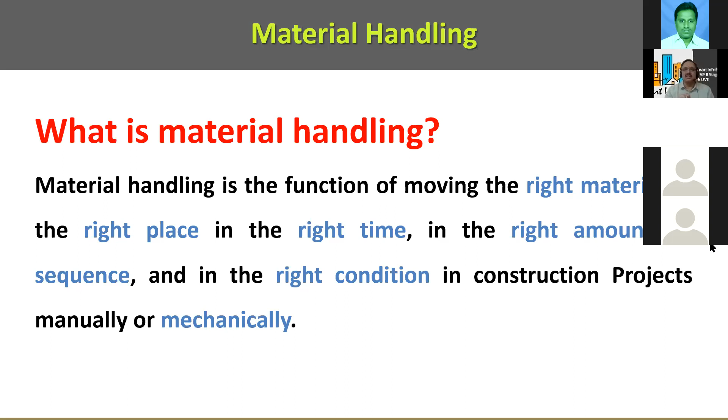This definition is also applicable to lean construction, which I'll cover again in due course. Lean construction actually means the right material to the right place at the right time - that means the shortest distance. If you track the movement of material, it should be the shortest distance. That is all about lean construction, apart from communication.

Now let us see what material handling is in projects. Any material starts from mining. Take any material - whether it is flooring, masonry, concrete, steel, even our doors and windows nowadays, the metal doors and metal windows, UPVC - all this starts with mining.

Then we mine, load it onto a conveyor or transport it, stack it. Again, from the stacked position, you transport it, process it, pack it, load it again, transport it, unload at the site, store at the site, shift it at the site, process again, load again, transport and place. See how many transports are there for any material.

Let's take the example of cement. Cement starts with the mining of lime deposits. So we mine the lime, take it to the cement plant, stack it, then transport it, process that lime in the crusher and all that.

Finally, process it, pack it into bags, load it again onto the truck, transport it to the site, unload at the site, store at the site, and again shift the cement for the mixing process - concrete or mortar - then load it, transport it, and place it at the right place.

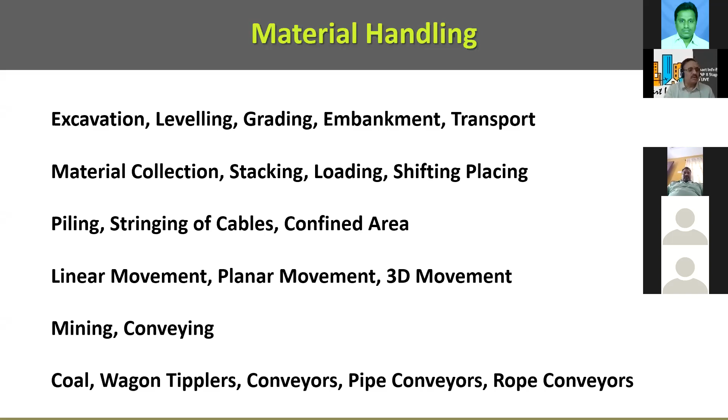Mining also uses bulk material handling systems, and conveying - after mining you have to convey the material and stack it somewhere. Coal, wagon tipplers, conveyors, pipe conveyors, rope conveyors are all various material handling systems that we come across as civil engineers. So we should all be aware of these systems.

Crushers means we use crushers for aggregates, coarse aggregate or fine aggregate. These are also very important, where there is a lot of material handling. You get the boulders, mine the boulder, crush them, move it, sieve it, and finally load it into the truck to get it to the site or batching plant. So crushers, silos for storage of material - a silo also in a way handles the material, so it comes under material handling.

Batching plants - we use all these silos and conveyors, and we have hot mix plants for highway projects where also we use a lot of material handling.

Tippers also we use for transportation of the material. So these are all the various material handling systems. You can see, starting from handling the drums, we use the forklifts for shifting of the material, and how we move the drums to the silos in the batching plant, how we load the material into the silo, and from the silo how we take it to the process, and even all this type of material handling system. We should all be aware of all these material handling systems.

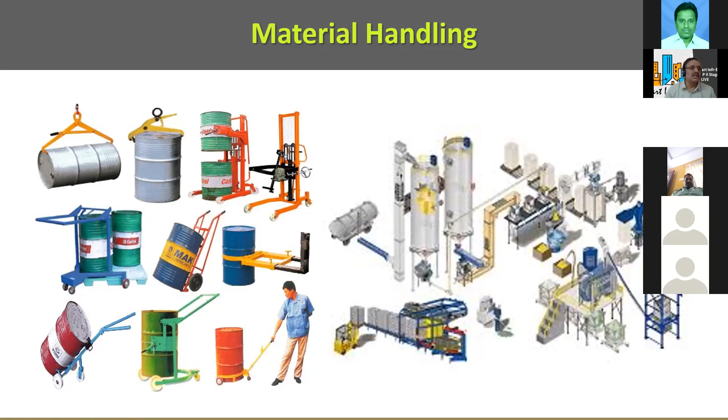This is lifting. We have these collapsible stools, and we have the forklifts and trolleys for moving the material. So these are all semi-manual movement of materials we use in construction sites, or industrial sites, or workshops, whatever we use in workshops.

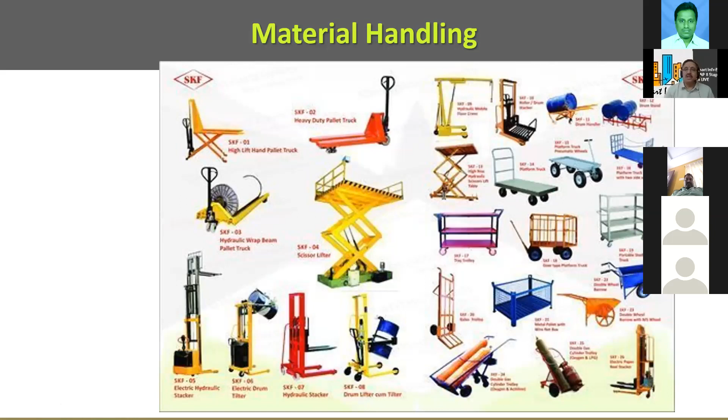And we use the cranes in the construction site. So we should be aware of categories of cranes. We have jib cranes, we have bridge cranes, we have gantry cranes, we have stacker cranes. So these are all the types of cranes we use in construction sites.

Mostly you see this kind of gantry crane nowadays in what you call precast yards. Whether it is bridge precasting or building precasting, you need to move the material, stack the precast elements and all. So we use gantry cranes which can move, and the spans can be as large as 20 meters, 30 meters for these gantries.

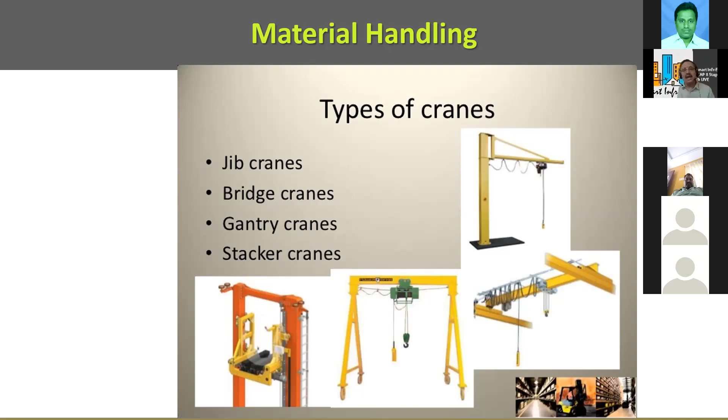So normally, material handling manually used to be done in almost all the projects in olden days. Of course, even 100 years back there were cranes, but limited use. In very large projects, they used to use them; otherwise, most of the projects had manual material handling.

For small size construction projects nowadays, people are still using manual material handling. We see in small sites even in cities, like 500 square yards, 1,000 square yards kind of sites, people are still using on-site mixing of concrete. They are not using ready-mix concrete, though it is available. So there you will have a lot of manual material handling.

It is limited to weight of material, because with manual handling you can at the most lift and shift about 20 kgs of material. Imagine how many people are required to shift 1 ton of material at a time. So it is a huge manual labor required.

And for short distances also, people use this manual labor. And where transport facilities are not available also, people use it. But I have used mechanization even in the remotest projects in the border of our India. So it is possible to use mechanization nowadays in any site.

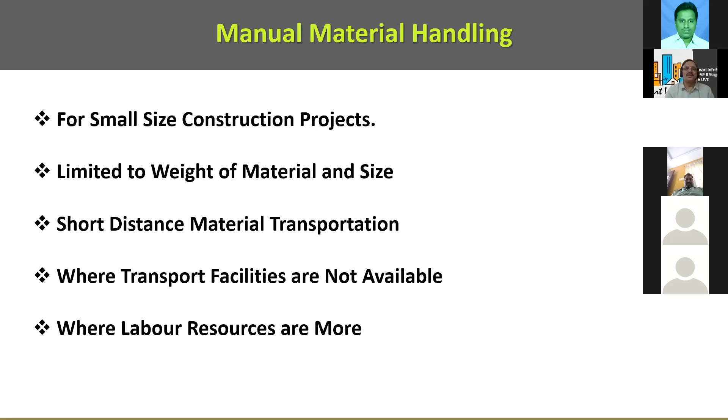So manual shifting, manual lifting is something we should avoid. As engineers, we should always encourage mechanization over manpower. People talk about manpower to be utilized. Even if you mechanize, there will be the same manpower required, but in different ways. So we should convert this kind of labor into more dignified labor, machine operators, and engineering kind of roles.

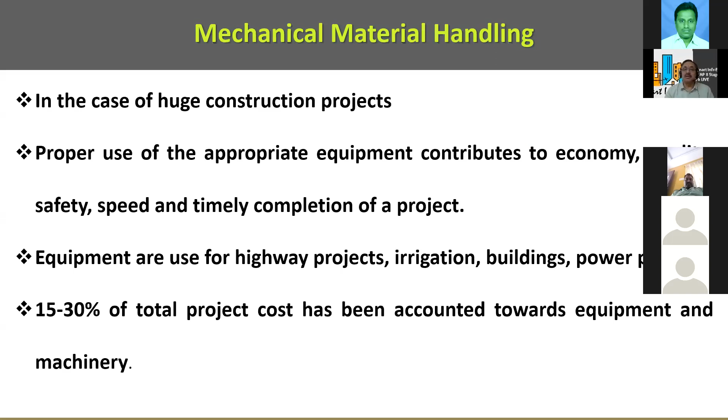So mechanical material handling is done in most of the huge construction projects. Proper use of appropriate equipment contributes to economy, quality, safety, speed, and timely completion of the project. Equipment is used for highway projects, irrigation, buildings, and power projects also. And 15 to 30% of total project cost has been accounted towards equipment and machinery. So this is a very important point.

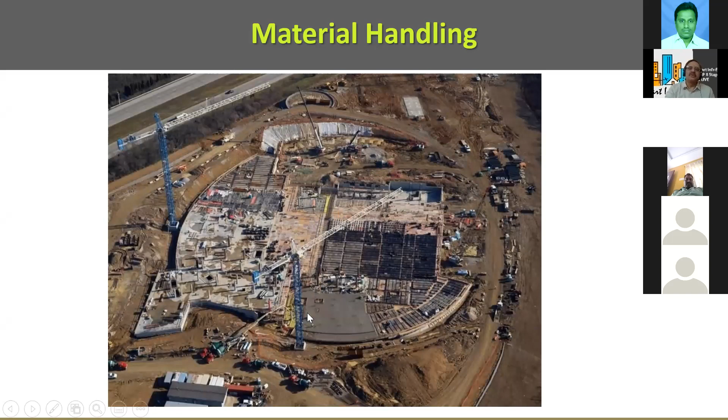So this is a typical picture of a site nowadays. You can see all the machines, all the transport vehicles, and all the cranes. So we should plan the construction site such that we cover the entire site by the movement of these jibs in the cranes, and at any height. So we have different types of cranes which we'll be covering today. This is the picture of past and present.

Even in building projects we see the same scenario. We have to mechanize 90% of the movement of materials nowadays, whether by weight or by the total handling distance. So coming to earth moving.

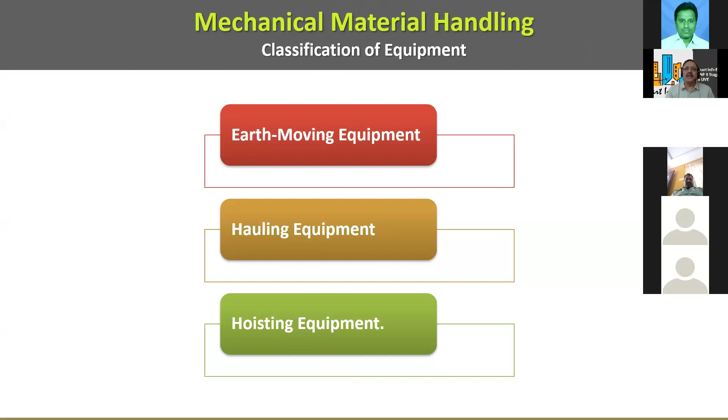In the classification of equipment, we have earth moving equipment, hauling equipment, and hoisting equipment. In earth moving, we have power shovels, backhoes, drag lines, clamshells, scrapers, and bulldozers. These are all the machines that we use.

I always say nowadays civil engineers, when planning a contract, must first decide the level of mechanization and incorporate the machinery required at the project site, even keep it in the pre-qualification. So we must all be well aware of the machinery required for each operation and their capacities, which we can get along with operation levels and costs through catalogs.

So the power shovel is used to excavate the earth and load it onto trucks, capable of excavating all types of soil. Its size varies from 0.375 cubic meters to 5 cubic meters, so a wide range is available.

Basic parts of the power shovel include the track system for movement, cabin, cables, rack, stick, boom, foot pin, saddle block, boom point, sheaves, and bucket.

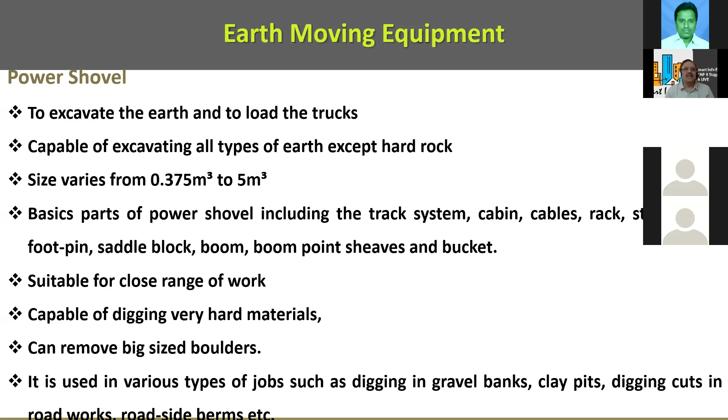The backhoe, also known as hoe, back shovel, and pull shovel, is used to excavate below the natural surface on which it rests, generally used to excavate trenches, pits, basements, and grading work which requires precise control of depth.

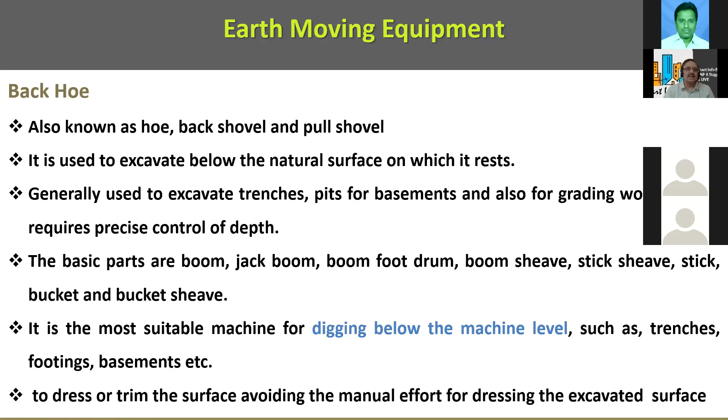We call it JCB mostly, but its technical name is backhoe.

Next is the drag line. It's so named because of its prominent operation of dragging the bucket against the material to be dug. Unlike the shovel, it has a long light crane boom, meaning it can stretch to any place, and the bucket is loosely attached to the boom through cables. Because of this construction, a drag line can dig and dump over larger distances than a shovel can do. So that is the difference.

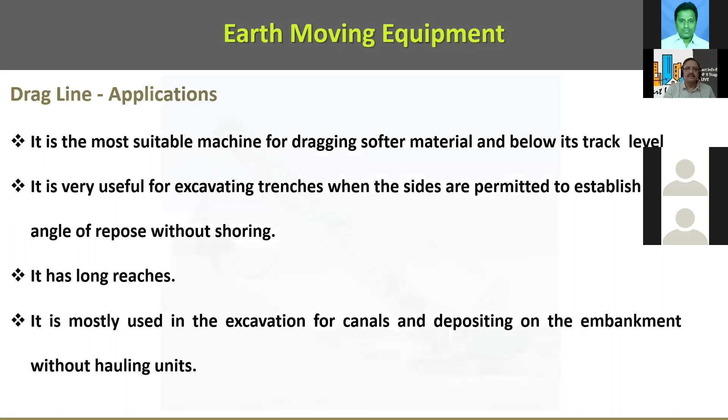Applications are: it's the most suitable machine for dragging softer material below its track level, and it's also useful for excavating trenches. It has long reaches, and is mostly used in excavation for canals, because canal width is higher, so you can form the embankment without hauling units, excavating and depositing directly. This drag line is also used in crushers.

Next is the clamshell. This is so named due to resemblance of the bucket to a clam, a shellfish with a hinged double shell. The front end is essentially a crane boom with a specially designed bucket loosely attached to it.

It can pick any stone or boulder, move it and place it. It moves like a clam, and can also be fixed with an anchor. It is used for loose materials such as crushed stone, sand, gravel, coal, etc. Its main feature is vertical lifting of material from one location to another, and you can shift it too. It's mainly used for removing material from coffer dams, sewer manholes, well foundations, etc. So you can pick it up easily.

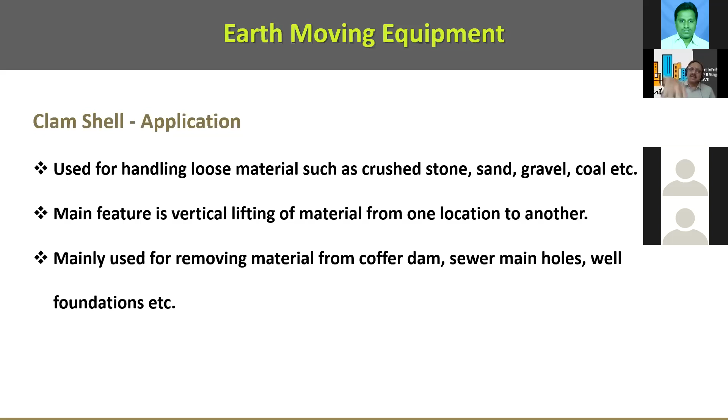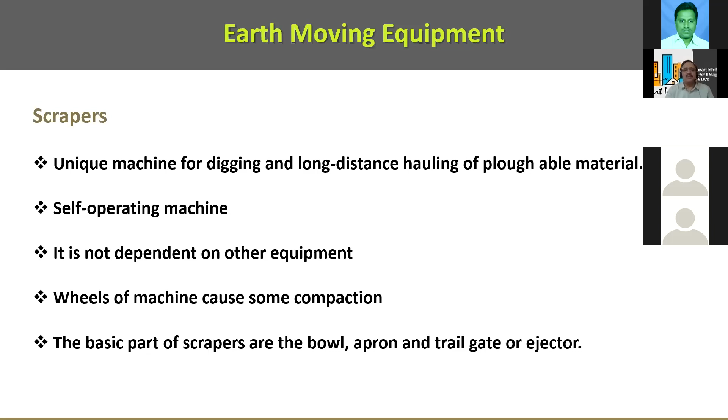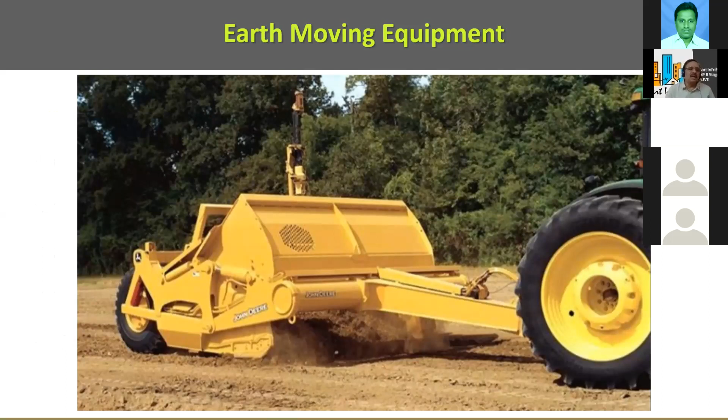Scrapers are mainly used for highways and runways where large stretches of existing surface need to be dug, and for long distance hauling of ploughable material. It is a self-operating machine, not dependent on other equipment, though the wheels of the machine cause some compaction. The basic parts of a scraper are the bowl, apron, and tailgate or ejector. This is the scraper. You can see the earth can be removed at a larger surface area, and it can be spread and leveled for formation of the subgrade in highways and runways.

Next is the bulldozer. The heavy blade attached to the tractor pushes the material from one place to the other. That's why we use 'bulldoze' in the literary sense also - it's very popular. The tractor can be of a crawler or a wheel type, and there are different types of bulldozers.

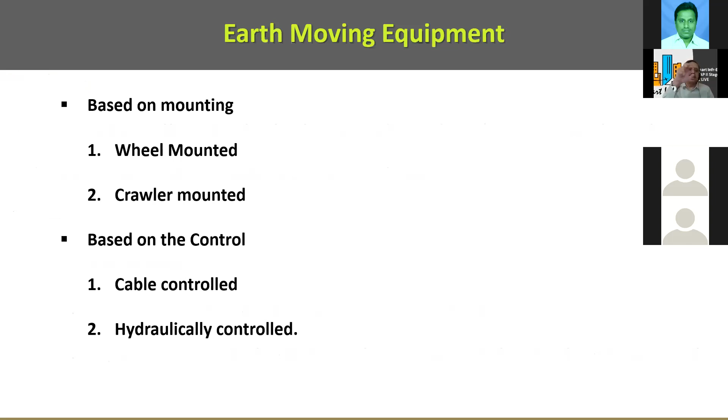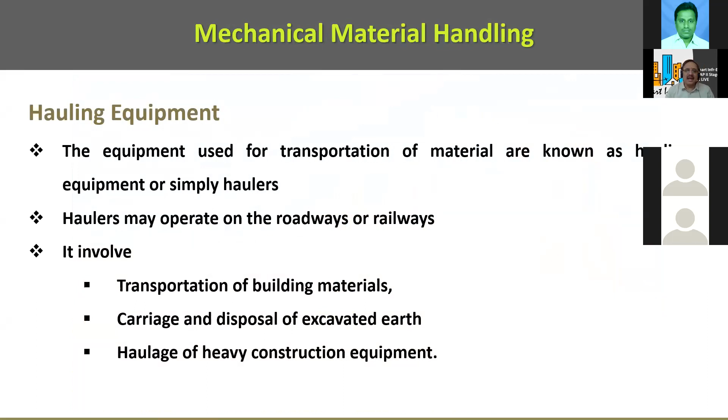Next is the hauling equipment. The equipment used for transportation of material are known as hauling equipment, or simply haulers. Haulers may operate on roadways and railways, and involve transportation of building material, carriage and disposal of earthwork, excavated earth, and haulage of heavy construction equipment.

These are classified on the basis of method of dumping the load. So we have dump trucks - side or rear dump trucks, and bottom dump trucks - and dumpers.

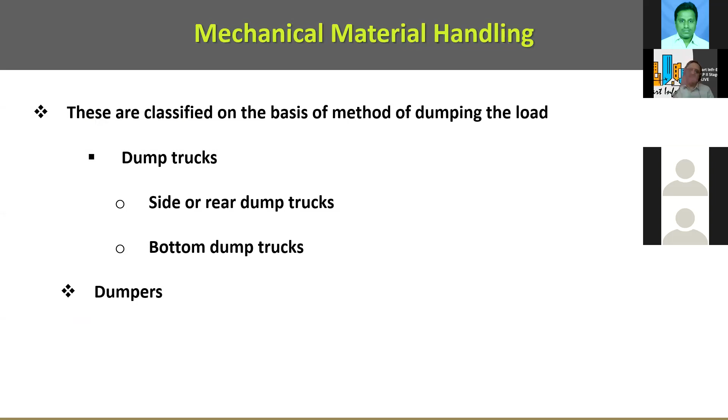Dump trucks are used for earth moving purposes. The selection of the type of dump truck is specified in many projects - what capacity is required, how many dump trucks are required, depending on the quantity to be handled. So when we schedule the project, we have to consider all these resources and specify them in our document.

Recently I went to a site where the engineer was answering, 'Sir, this is a fast track project, that is why we could not have the material readily on site, so we had to use the wrong material.' That's not an engineering answer.

Similarly, when we do a fast track project, we have to estimate the machines required, their capacity, and their productivity levels, and then plan the schedule. It's not just using Primavera or MS Project that is planning. In planning, we must visualize the whole project - what is the material movement, and how the material will be moved cost effectively, in a time bound manner, and efficiently - and then plan our schedule. The schedule should define all these machines required so it is realistic and achievable within the cost estimate, which must consider the capital cost of these machines. That is how we should decide the mobilization advance, because it costs to mobilize all this equipment to the site.

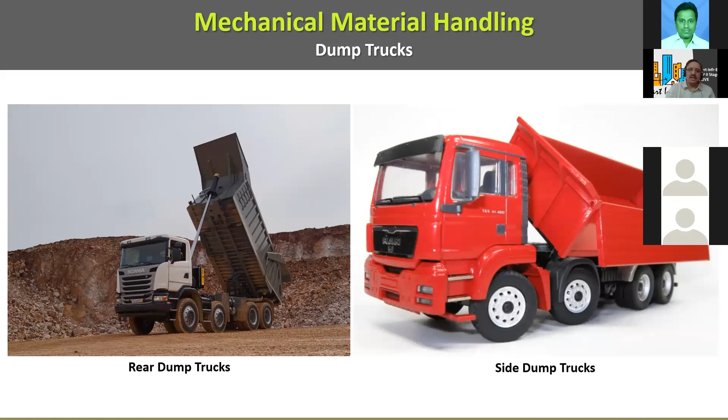The dumpers are high-speed pneumatic wheeled trucks, very important for transporting material on site. A loader will load the dumper, which will take and dump it wherever needed in the spoil tips. With a short chassis and strong body, loading, hauling and dumping is very fast compared to other equipment, suitable for short hauls on rough roads, especially where shuttle movement - pick, dump, and repeat - is required. This is a short haul dumper.

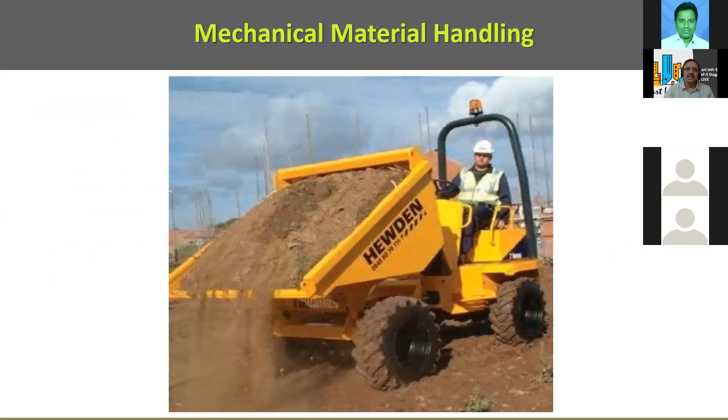Hoisting equipment. Hoisting is lifting a weight from one location and moving it to another. We have different types of hoists, including builder hoists and cranes. Big projects such as construction of dams and industrial buildings require hoisting equipment.

A crane is the only single machine which, as a single piece, is capable of providing three-dimensional movement of any weight. So these are the hoists.

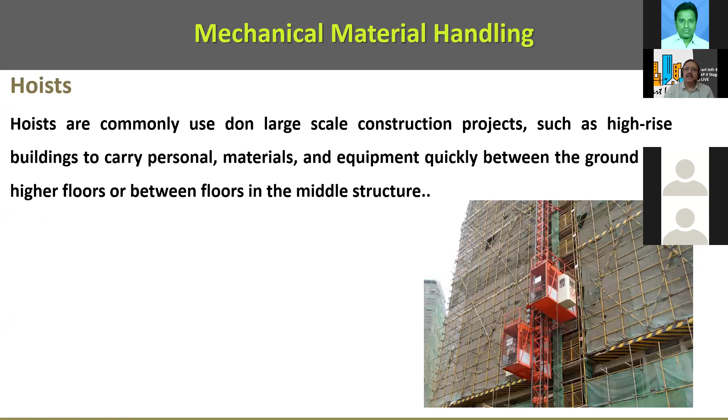You can see this is a builder hoist and a passenger hoist, and multi-purpose hoists are very common nowadays. You can shift material as well as workers. These are very important for any high-rise construction.

This is a simple builder hoist for lifting material. Even for a 5-storied construction, you can use this builder hoist for shifting material like bricks, mortar, and any other material.

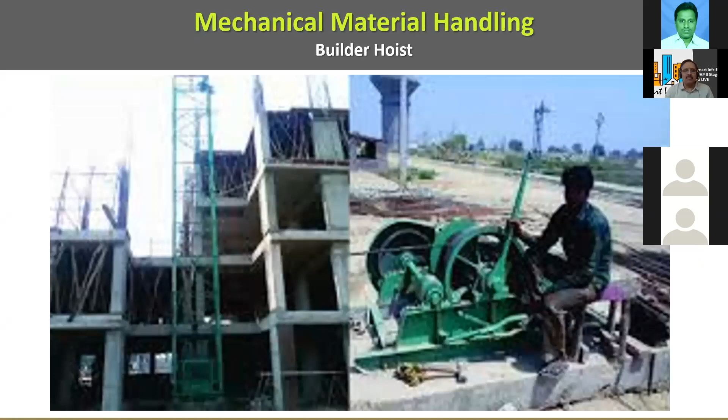This is a builder gantry hoist, which you can use even after construction for shifting material. You tilt the bucket by pulling into the building line. This is the builder gantry hoist.

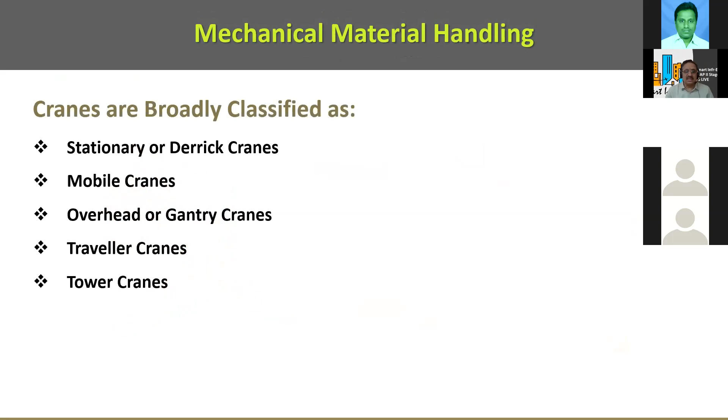Next is cranes. We classify them as stationary or derrick cranes, mobile cranes, overhead or gantry cranes, traveler cranes, and tower cranes. These are all the types of cranes we adopt in construction sites.

Derrick cranes consist of a mast, a boom, and a bull wheel on which the boom rotates about a vertical axis, with supporting members. They can be electrically operated, diesel operated, or diesel-electrically operated. The boom can revolve through 360 degrees. This crane is used for heavy loads up to 200 tons, even up to 300 tons.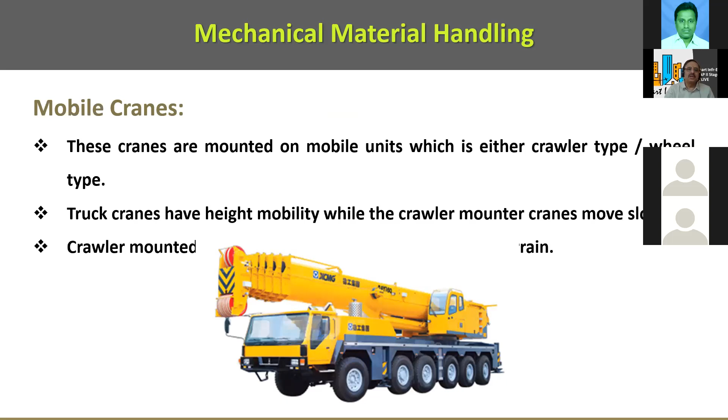So this is a crane which can rotate, and these are jib cranes. This is a telescopic crane also, which is wheel mounted, and similarly we can have crawler mounted cranes.

Gantry cranes serve large areas, particularly in casting yards. In construction sites we require this kind of gantry crane, with freedom from floor obstructions, moving overhead with three-way mobility - horizontal, longitudinal, and vertical movement. They are widely used in erection, foundry, steel plants, storage yards, and various industrial works.

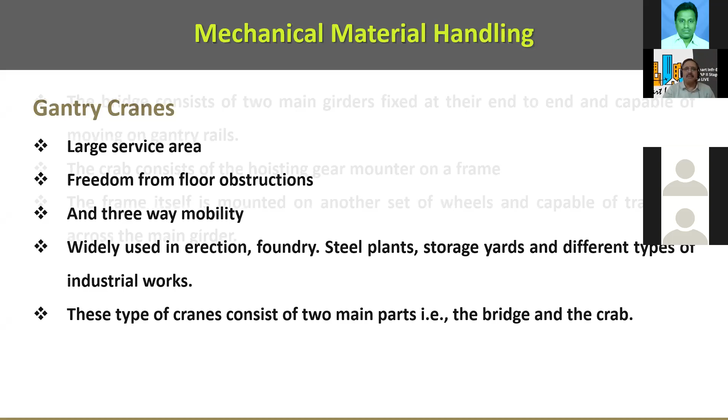A gantry crane consists of two main parts: the bridge and the crab. The crab is for moving, and the bridge is for shifting the crab. The bridge consists of two main girders fixed at their ends, and the crab consists of hoisting gear mounted on a frame, which itself is mounted on another set of wheels. This is the gantry crane, seen in yards and casting yards.

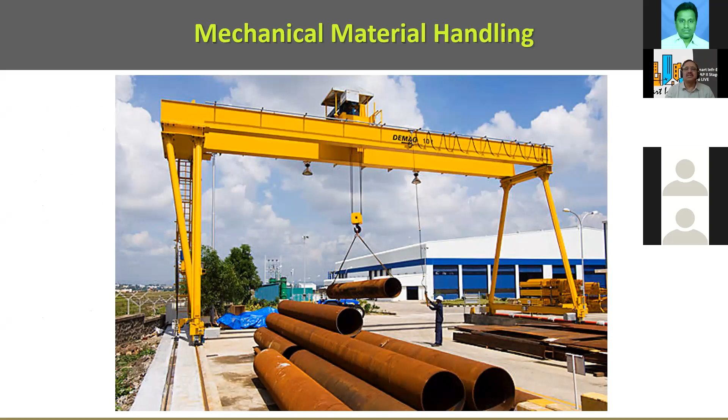We also see these overhead cranes in workshops or factories that we design. Gantry cranes are very popular in industry design.

Monorail overhead cranes are another type where you have fixed movement of the material. We use these monorail cranes in powerhouses and similar settings, where we have to shift a transformer, generator, or turbine.

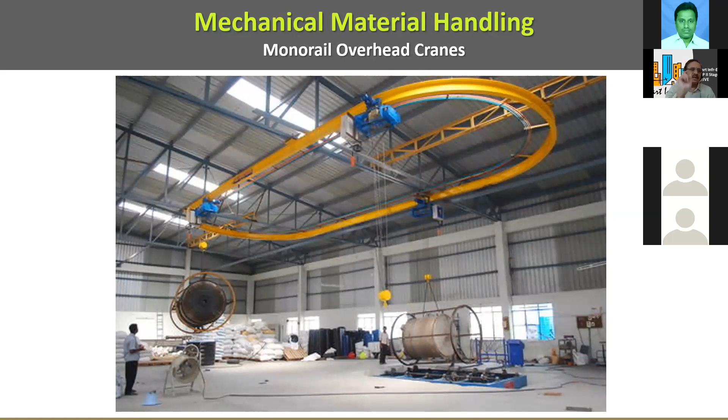Traveling or bridge cranes have their crabs moving on girders, which are supported on legs, and the legs are capable of moving on track slides.

Tower cranes are most popular nowadays. We should not decide on equipment without thinking - there are consultants for mechanical material handling, like CMAC, Construction Mechanization Consultant, in Hyderabad. They specialize in suggesting the right equipment, since you cannot use a tower crane for every project, nor a builder hoist for every project. Depending on time schedule and type of construction, they advise the right machinery to optimize the cost of moving material.

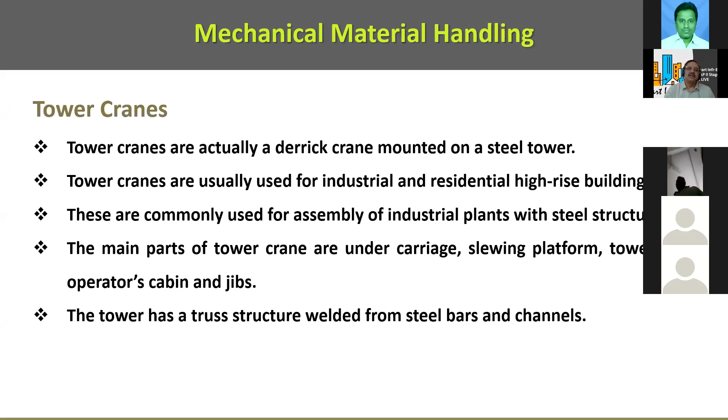Tower cranes are actually a derrick crane mounted on a steel tower, usually used for industrial and residential high-rise buildings, and commonly used for assembly of industrial plants with steel structures. The main parts of a tower crane are the undercarriage, slewing platform, tower with operator's cabin, and jibs. The tower is normally constructed with lattice structure. This is a typical tower crane, which can go up to 100 meters in height.

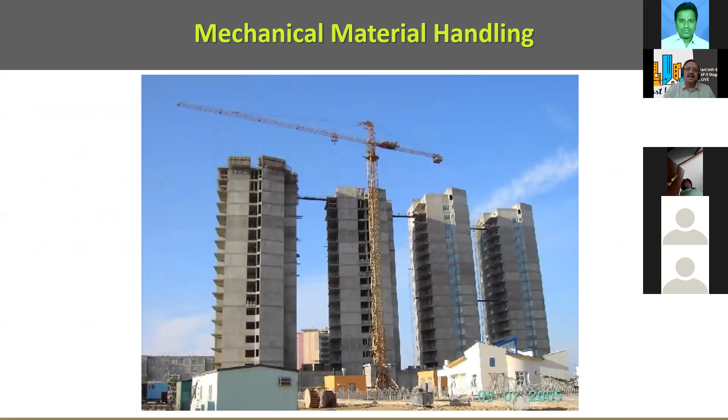There are different types of self-erecting tower cranes and shifting tower cranes, which I'll show now. This is a tower crane. Even in a busy area, you can use the tower crane very effectively, but safety aspects need to be taken care of very well.

Conveying equipment transports material from one place to another. Even in industries, we see railway lines laid for 200 to 500 meters for carrying material, and this can be done horizontally, vertically, or inclined. Pipe conveyors are used for this, and you see very steep conveyors in coal mining too. When the equipment conveys horizontally it's called a conveyor, vertically it's an elevator, and inclined we use pipe conveyors.

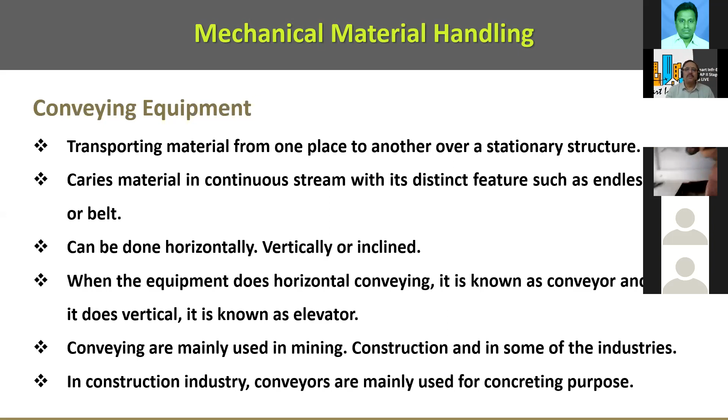The utility of these is that they increase output, facilitate continuity in operation, and result in time saving. We even use them in laying floors, putting a rail down. Suppose I have to do 300 meters long flooring of 100 meters width - how do you take the material? You better lay a rail, or you can put a monorail and move the bucket on it. So we have to think of all the options and arrive at the most efficient one. We have belt conveyors, screw conveyors, bucket conveyors, aerial transport, and pipe conveyors.

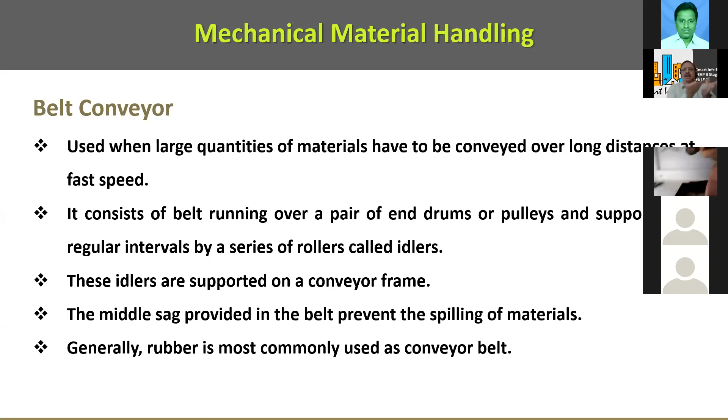The belt conveyor consists of a belt running over a pair of end drums. These idlers are supported on the conveyor frame, and the middle sag provided in the belt prevents spilling of the material. These belt conveyors are used mostly in our crushers.

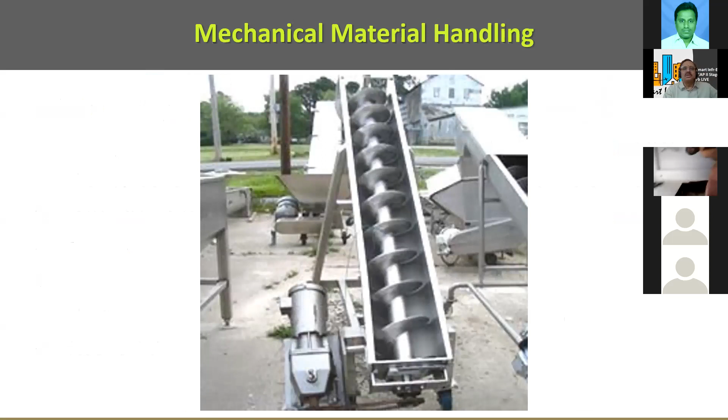Screw conveyors are also used in crushers. We have these screw conveyors, and we have these bucket conveyors, which are also used in crushers. The length of these conveyors is limited to 25 meters due to the weight of the conveyor and the strength of chains required.

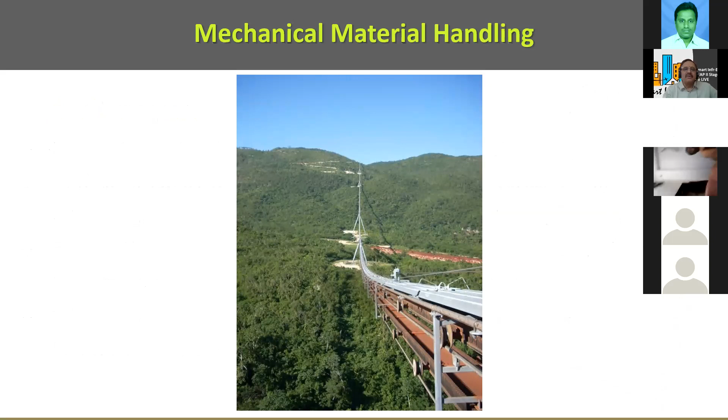Aerial transport - we see these ropeways, also called aerial conveyors. You can see this used largely in mining, for long distance transport.

We have concrete wheelbarrows, where you put the material in and shift it - these are semi-manual. And we have concrete buckets - when there's huge concrete to be placed, we use this kind of concrete bucket, for mass concrete.

We have truck mounted concrete boom pumps, used for quick concreting, because with normal pumping you have to shift the pipes and all that. This boom placer is the fastest concreting system.

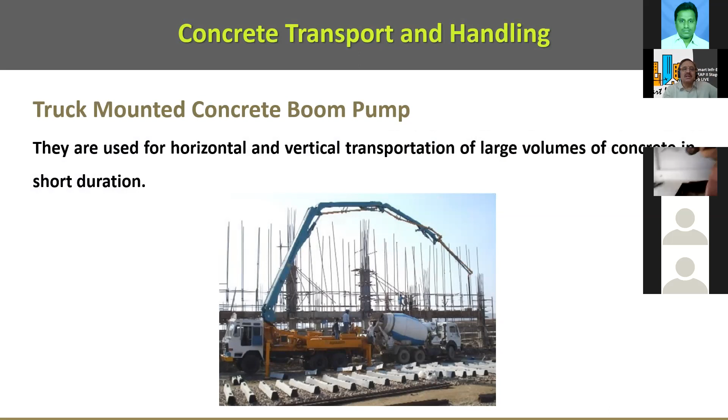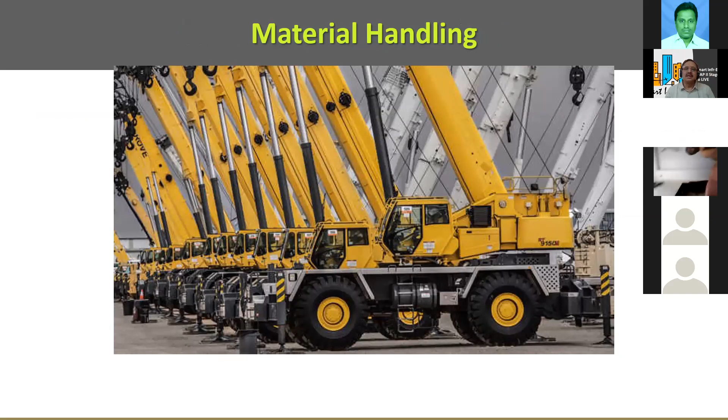So these are all the various machines we use - the cranes and pneumatic cranes, and we have these different material handling concepts.

Nowadays we have augmented reality and virtual modeling of construction sites. We model the construction site, and in BIM we have LOD 5, LOD 4 for planning even the construction. You can see how the construction moves, imagine and plan the machinery positioning without hindrance and very safe handling of materials.

We have to plan for the movement - space planning, movement planning, and safety planning during construction is very important. We even have to move people to work, so these are the cranes for handling and holding people.

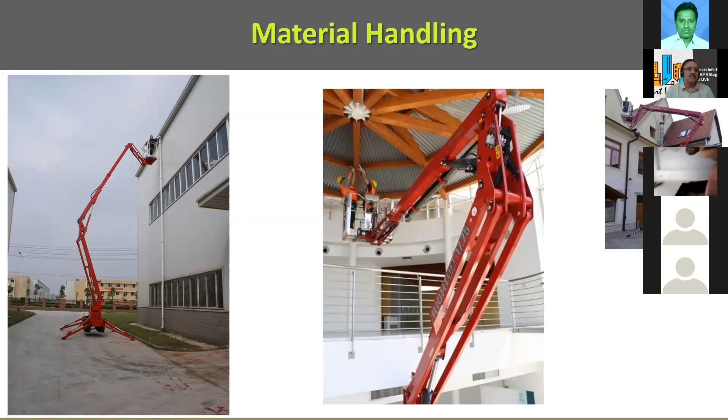We have used this also in our construction sites, whether for facade work or erection of downtake pipes. Even inside for interiors, and outside for finishing roofs, we use this kind of crane. You can see the movement of people can be from any position to any position.

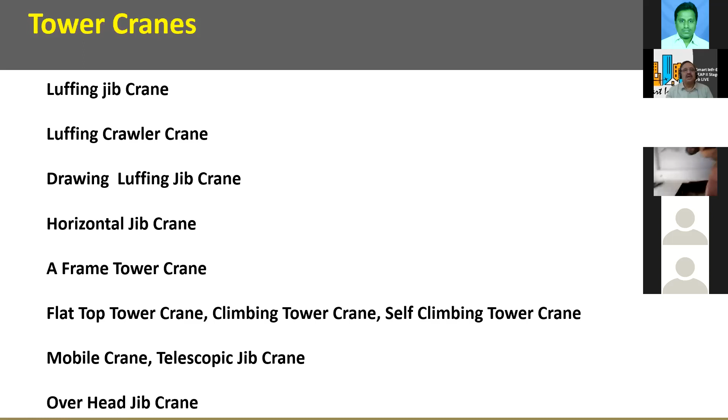So we have to assess the requirement of the site very clearly, study all these types of cranes available, and then plan which is the most cost effective and energy efficient for our given site.

So this is a luffing jib crane. That means you have that cable, and nowadays even with developing technology, drones also can be adopted for the future actually. So I just picked this picture to show.

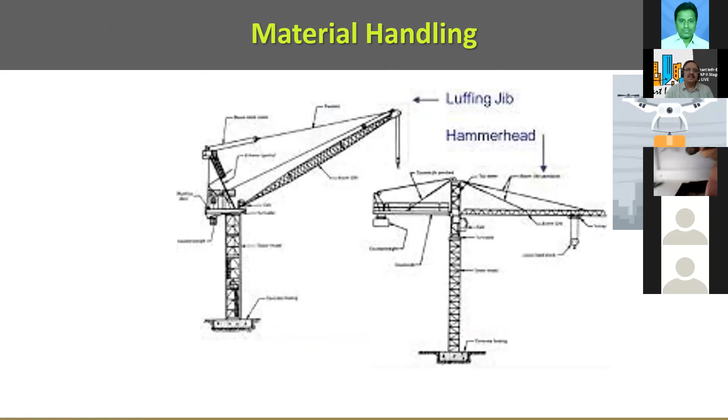And this is a hammerhead and this is a luffing jib. So these are all the different types of cranes that we use at the sites. So this is the catalog. It's not clear actually, but you can use this catalog for, they'll always vary in the cranes, depending on the angle.

So the difference between a luffing crane and normal jib crane is, with a luffing crane you can have a movement within the vertical plane also, and then rotate and then come down. So for this luffing crane, the lifting hook capacity is given in the table for every position, that is longitudinal position, angle position, there will be difference in the capacity of the crane. So you have to consider this.

We have seen accidents. So here you can see these different positions and different capacities of the lifting, and you can see here also in this diagram.

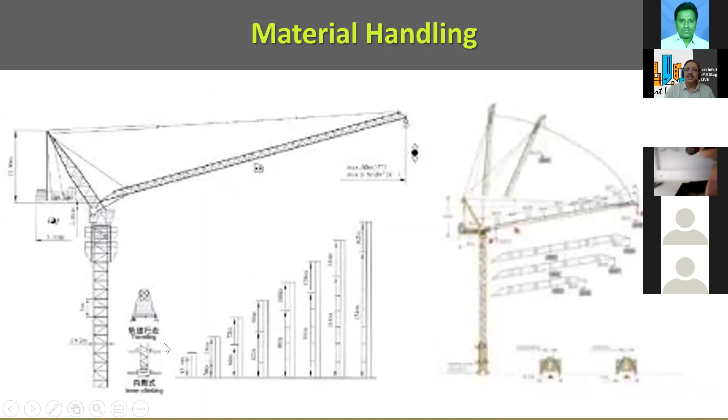And this is a normal jib crane which will only swivel within the horizontal plane. So you can use this kind of horizontal cranes also, and luffing cranes also.

So this is the self-erecting type. You can see here, this is self-erecting, and here it is through the building itself, you will be lifting the crane. This is used for very tall buildings or skyscrapers, where you cannot, suppose Burj Khalifa you take, you cannot think of an 800-meter tall crane.

Some cranes up to even 100 meters, 150 meters, you can have building propped cranes, towers actually. Building propped, so it cannot be self-standing. At 100 meters, 150 meters, it will be very uneconomical. And imagine the counterweight required at the base for such cranes.

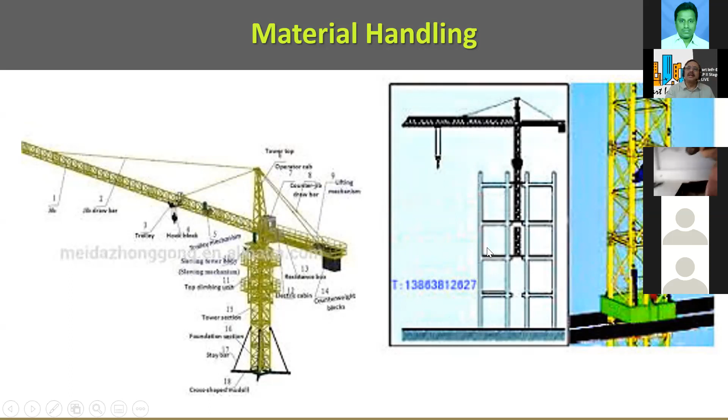So here you can see, this is the crane supported on the building itself as the building moves up. Here also you can see, somebody was telling lift shaft. Yes, in the lift shaft we can put this crane tower and support it to the existing structure itself.

And here this is moving on a rail, so the crane's one direction movement can be on rail. So this is all we have to consider. Suppose we have a multi-tower, so 4 towers, do you erect 4 cranes, or can the same crane move? Depending on the schedule of the project, we decide which type of crane we adopt.

You can see here, the tower is supported on the base frame, and the base frame is on the rails, and it moves. So this kind of crane will erect, and we have multiple cranes.

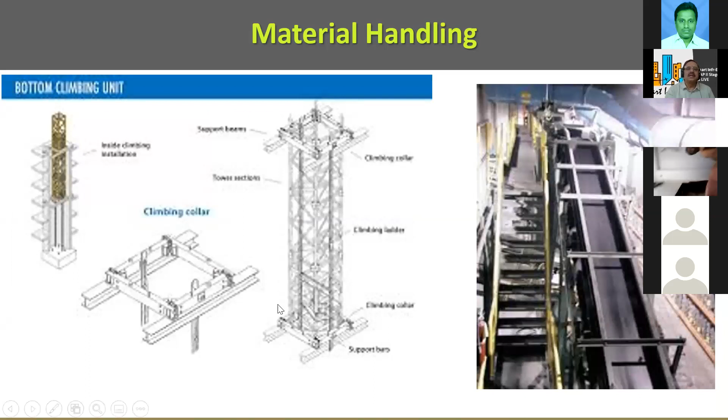And this is the material handling. You can see the conveyors and these tower cranes and the self-erecting tower cranes.

So these are the capacities. Here you can see at the tip, 61.9 meters, the capacity is 3.61 tons. And at 40 meters, it is 6.8 tons, and at 21 meters, 12 tons. So depending on this, we have to plan the capacity of the crane.

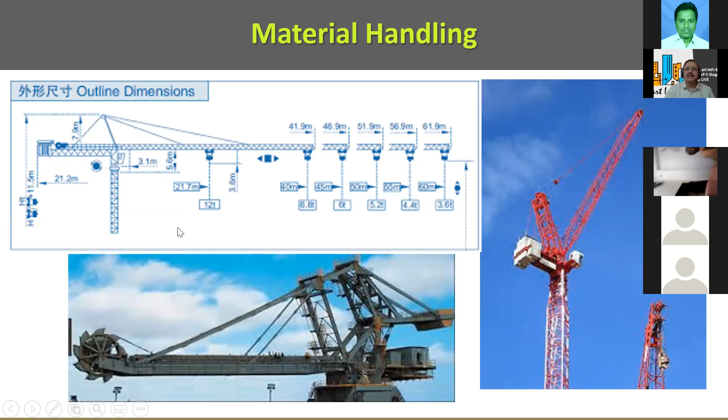And here you can see the luffing crane. And we have these in industries, overhead cranes also, or workshops, overhead cranes. So we have to consider this. And here you can see the counterbalance, the weight required.

And here you can see that there are multiple cranes in the same site. So you have to plan very carefully the number of cranes required and different types of cranes for different applications.

So mainly nowadays, even for shifting the formwork. Earlier days, we used to have 3 feet column boxes. Nowadays, we have even done 6 meter columns with 1 meter diameter. We are seeing this in the buildings also.

And to move such formwork, you cannot dismantle completely and move it in small pieces. So the weight of the column box itself can run into 2 tons. So we need a crane even to, after stripping, move the box and place it in the next position.

And this is the unloading of the materials at the site. So containers also will be using the cranes for shifting. Here you can see the self-erecting crane.

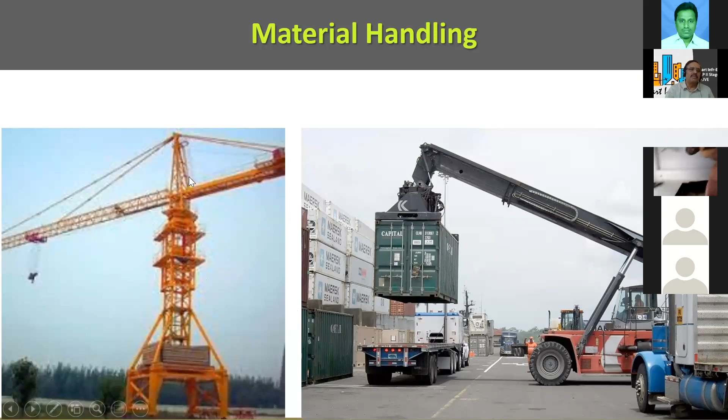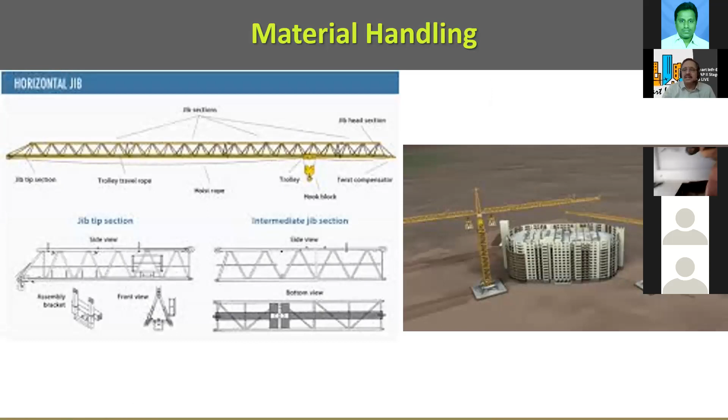And tower crane luffing boom, you can see this is in the vertical plane, it can shift and tilt. These are all the various horizontal jibs, lattice, and you can see high-rise construction. We make the drawing depending on the diameter, the size of the boom and height of the crane is decided depending on the size of the building and height of the building. And this is the three-dimensional representation.

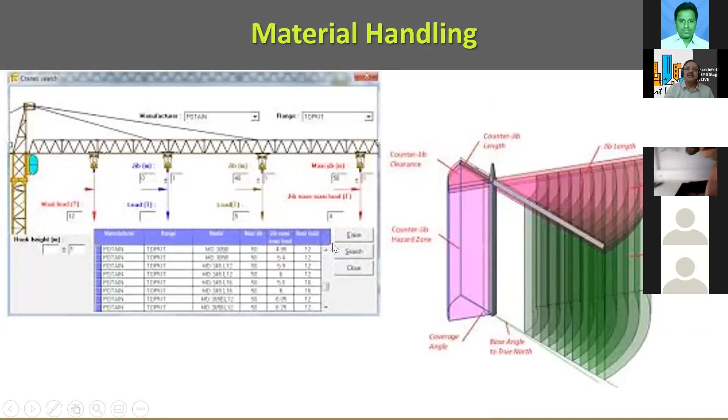So this space, you have to keep it under safe zones. This catalog gives you the capacity of the hooks and how it moves. So within the restricted space, these mobile jib cranes also can be used depending on the application.

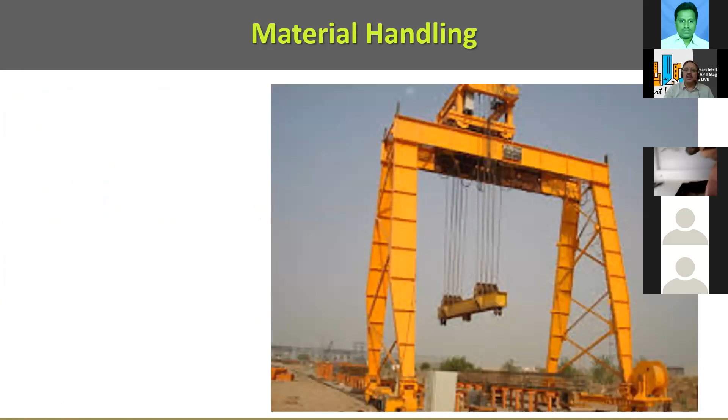So let us be aware, you need not buy one machine for each of these. You have to buy spare buckets and spare attachments, and with this same JCB you can use it for all the applications. So you have to verify the catalogs for all these details.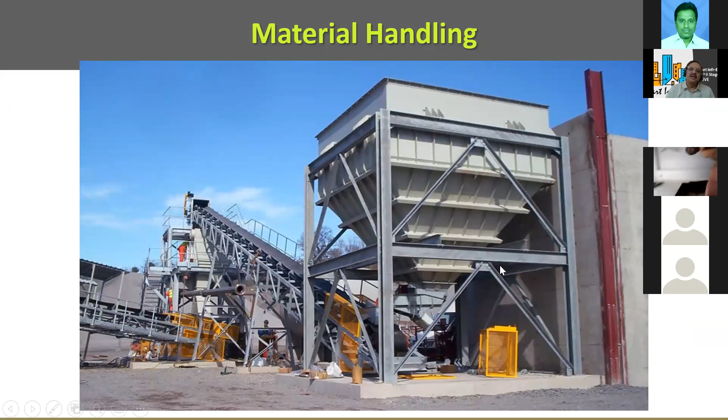And this is a typical batching plant - you have the conveyor, silo, hopper, and all this will be used in the construction. And here you can see the JCB being used as a forklift, lifting the material.

So you can see various applications of why we go for luffing crane. Here you need not increase the height, but still you can reach the height by shifting. So you can see multiple placing of this crane and its usage in high-rise construction.

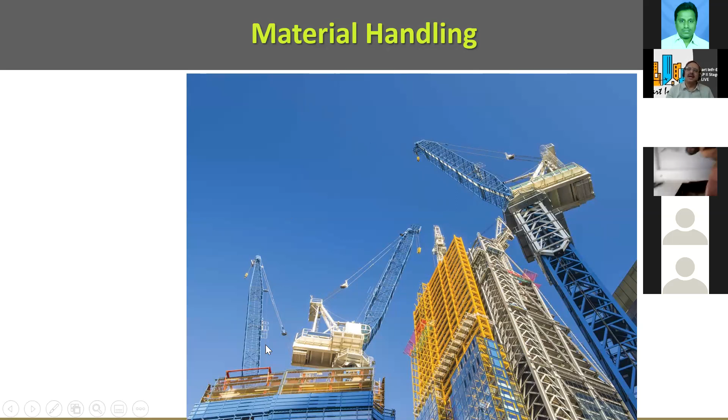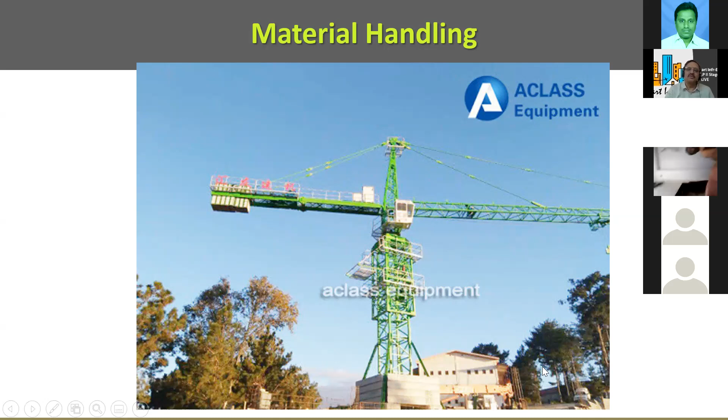So this is another horizontal jib crane with a counterweight. And you can see the base weight also we have to provide. Normally these crane suppliers ask us to supply this concrete, so we have to make this concrete before even we start the construction.

So nowadays we have this multi-purpose hoist, so even the reinforcement you can carry on this. They give us a separate attachment for up to 12-meter long rebar, and you can shift it using this cabin itself with that attachment.

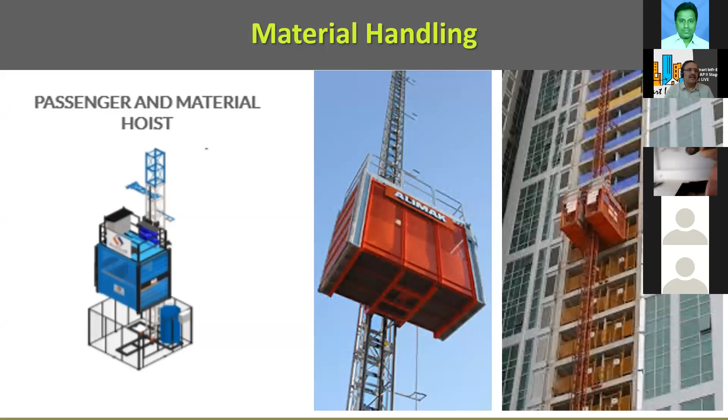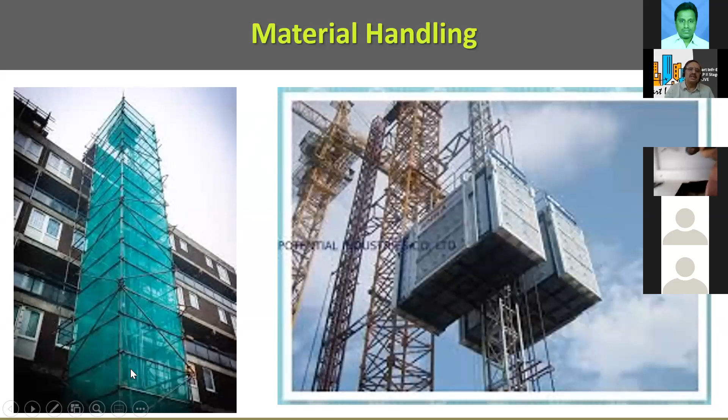And this is a simple hoist, and these are the builder's hoists. You can see passenger hoist cabins here and material hoist cabins. And this is a common sight for safety - we put the scaffolding and hoist within this so that people can go.

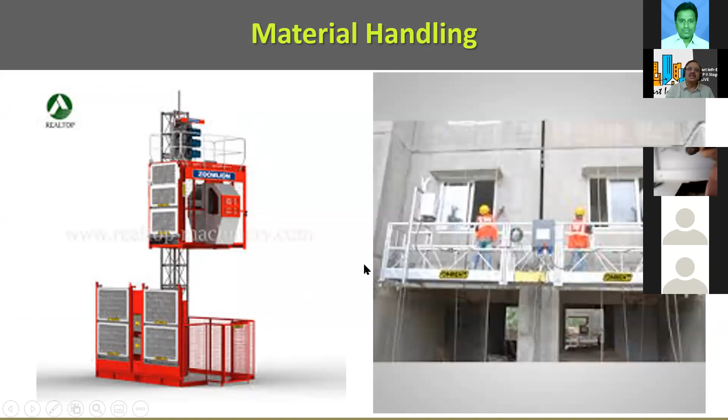And this is that application of the platform, mobile platform. So people can work standing on this platform. And this is material hoisting.

And now these are the launching girders, which are used for bridges. So these are custom designed girders. You have specialists for supplying these launching girders and designing - it's a huge construction engineering feat. Nowadays we are seeing complete spans being launched using these girders.

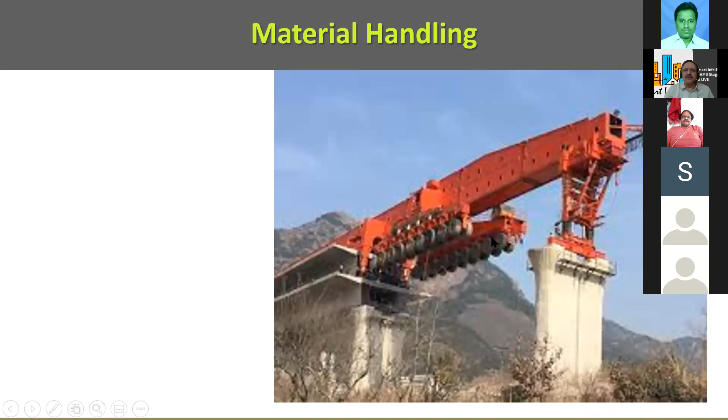So this is the application of this - you can shift the whole precast girder on this and it moves by itself. This is another one, you can see a box cell, also a single span being transported using this, and it moves on its own. So this kind of launching girder is also part of this material handling system.

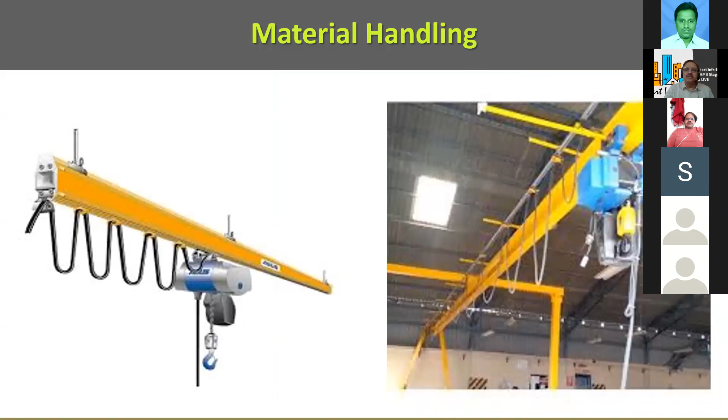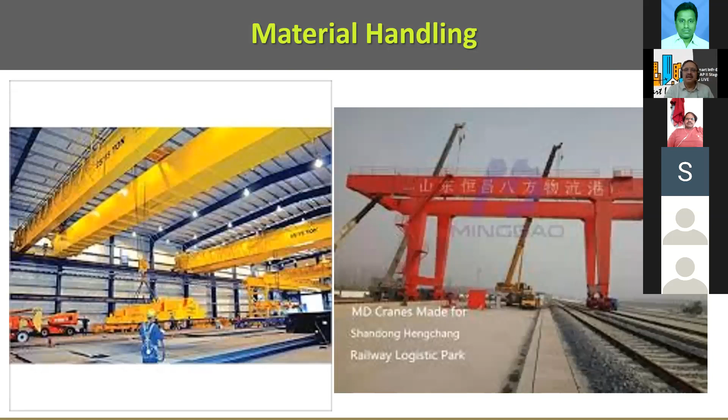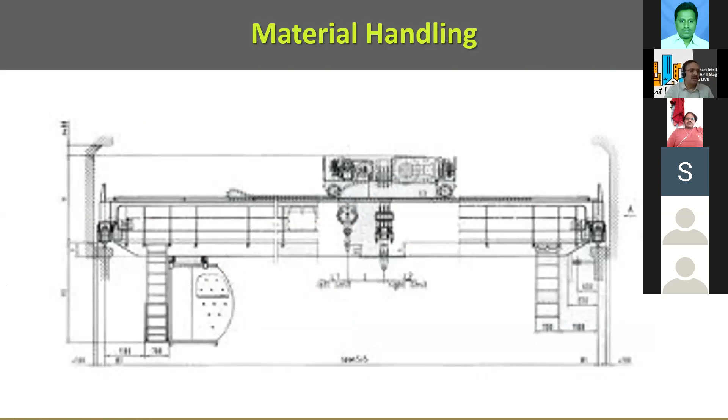This is the three-dimensional view of a gantry girder. We have gantries and a crab moving trolley. These are the things, and hooks are very important in this.

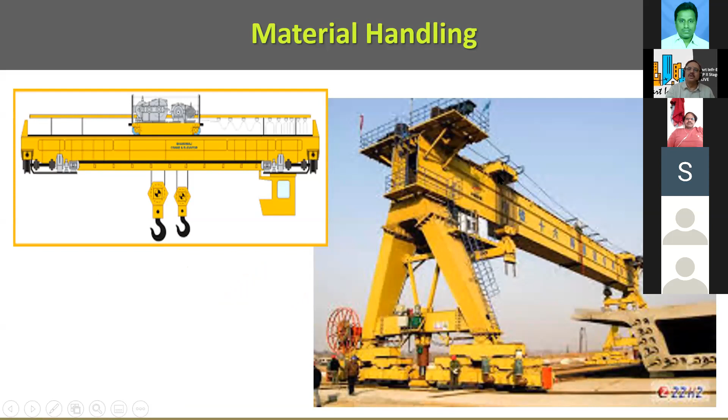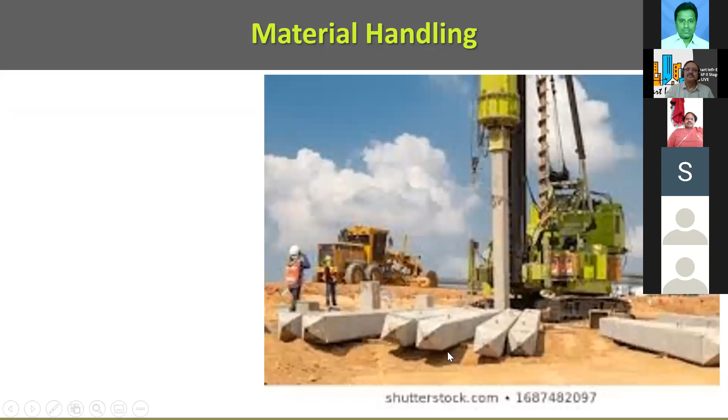Do we have to import? No, as I mentioned, we need not import all this from China alone. We have Make in India - there are many companies who manufacture this equipment.